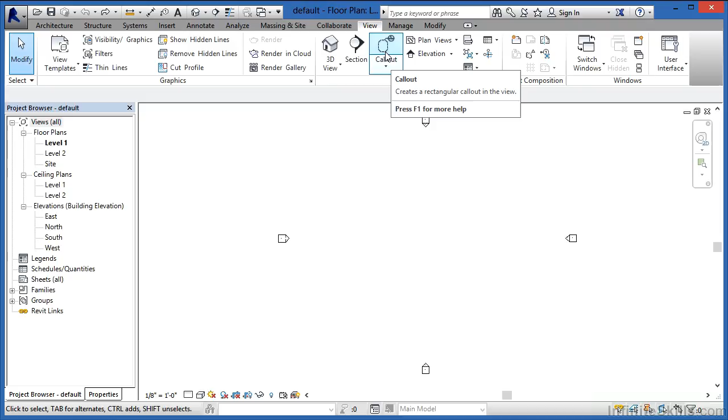Callout symbols, also called callout bubbles, can be found underneath the View tab. Actually, a callout bubble and the callout symbol, sometimes called a callout tag, are two individual things. The callout bubble is the circular shape that you draw around your view. The callout tag is that piece of information that says this bubble is going to be creating a view, and that view can be found on sheet, listing whatever the sheet is.

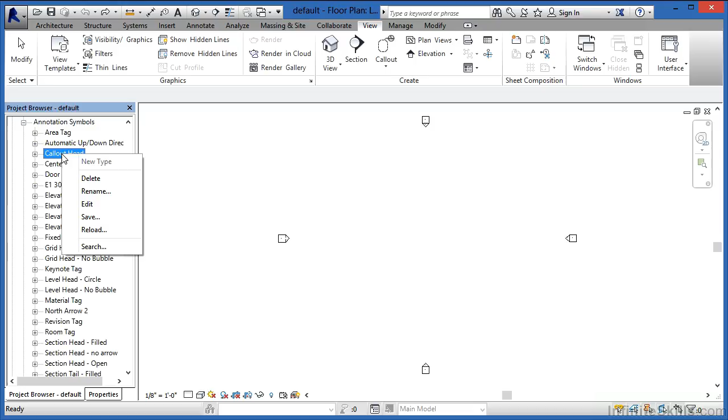To make an adjustment to the tag, find that under the project browser, expand out the word families, expand out annotation symbols, and then find your callout head tag. Click on it once to highlight it, right-click, and go to Edit. From this environment, it's easy to change because it's the Revit drafting tools, which allow you to draw arcs and lines and circles that have created this symbology.

A label is a piece of information that can dynamically adjust when it's put onto a sheet. This number 1 is going to be detail number 1 when this callout bubble's detail gets placed onto a sheet. A101, that's going to be the sheet number. And if that detail, that drawing, would get moved from one sheet to another, this information would update on the fly. The reason it updates on the fly is because it's tied to what's considered a parameter, and that's what a label has inside of it.

If we select on the piece of text, the label, and then come up here to Edit Label on the ribbon, we'll see the parameter that's associated with that label. If we wanted a different parameter, simply highlight on the parameter, click on the red arrow, and pick a different one off the list, such as detail number. Then click the big green arrow, and now detail number would show up there instead of the reference label.

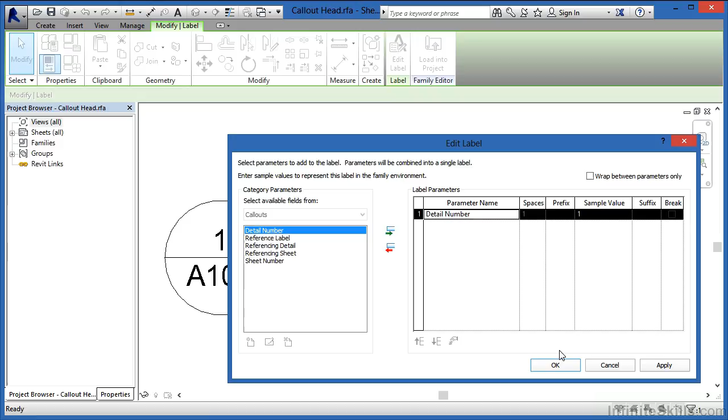Now in this case, I really like the way that this one is already set up, so I'm not going to save the changes. But if I did want to save the changes, I would just click on the OK button in the lower right-hand side of the screen. Since I don't want to save the changes, I'm going to click on Cancel.

If this was just going to be a static piece of text, some piece of information that never needed to change, I would use a piece of text. So I'd come up to Create and then draw in using the typical text command and type whatever I wanted it to say. Then once those changes are made, you should always load that back into your project or load this back into your template so those changes can then be updated.

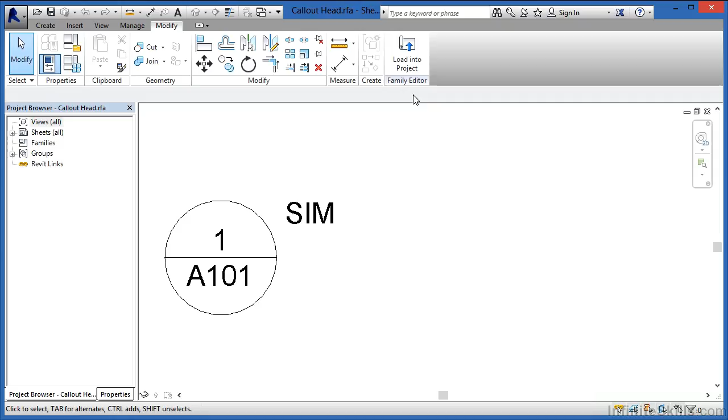To do that, you come underneath the Modify tab and select Load into Project, and then pick the project you'd want to load this into. In this case, my template is called default.rte, so that's the one I'm going to select on, and it's now loaded that back into the project.

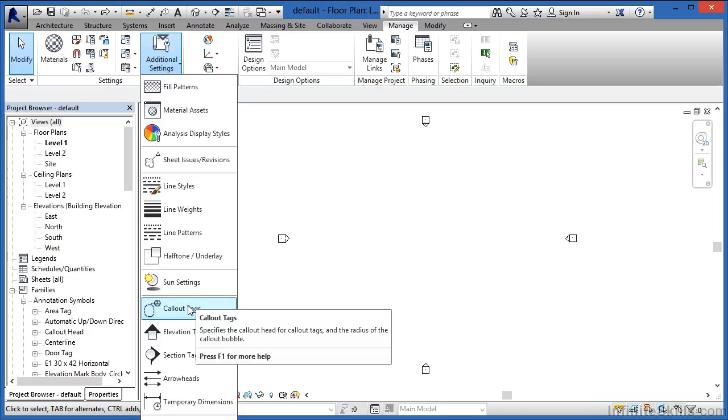Now, the other half of that callout symbol is not the callout tag, but the callout bubble. To make modifications to the callout bubble, you need to come underneath the Manage tab, Additional Settings, and then find callout tags on the list. When you do, you'll see there's an option here for the callout head. That's the family that you just made that modification to. If you wanted to choose a different callout head, you could. You just come in here and select a different family off of the list.

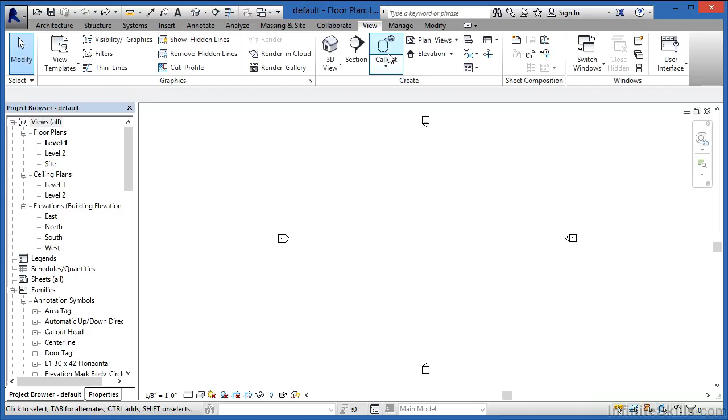The other option for the bubble is the corner radius, and in this case it says 1/8 of an inch. You can stay in this dialog box. I'm just going to illustrate the point. I'm going to move in here to View, select on Callout, and draw a callout. That radius is this arc that shows up there.

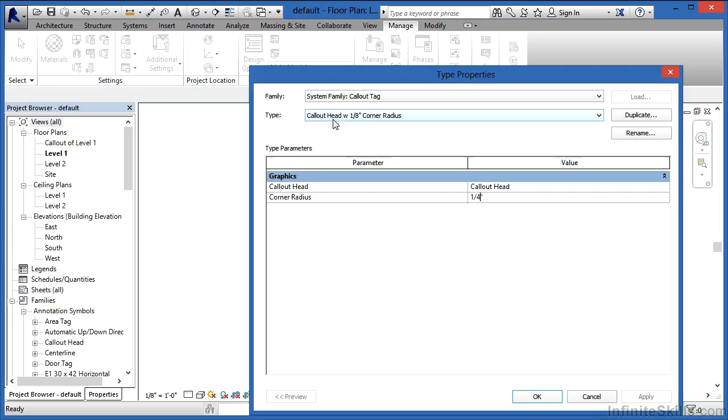If I want to make a modification of that, I'll come right back into callout tags, and now I change this to be a different radius. And ideally, you should really probably duplicate this and give it a different name so it doesn't say callout head with 1/8 inch corner radius. It should say callout head with 1/4 inch corner radius instead. From this point, I'm going to click on OK. And now this is going to be a bigger radius.

I'm just going to click on the Undo button. See how it did change in size? I'll select on the Redo button so you can see that one more time. And now, once again, I'm going to undo it because I like the way that it was before.

So to make changes to the callout bubble, you come underneath the Manage tab, Additional Settings, and Callout Tags. To change the tag itself, the way it looks, and the information it displays, you need to move underneath the words Families and Annotation Symbols, find that family, right-click on it, and go to Edit, then use your typical drafting tools to make modifications.